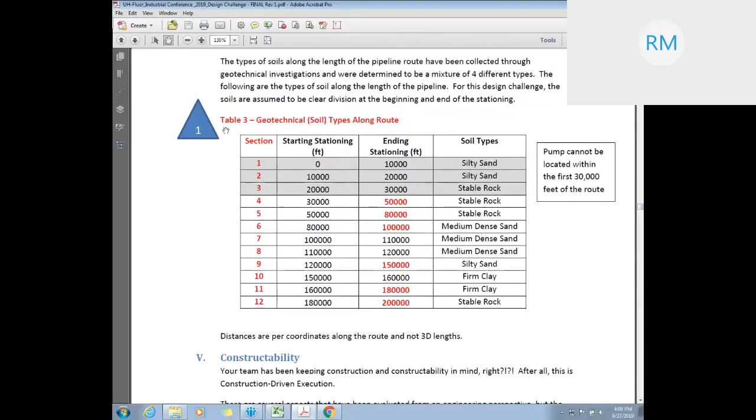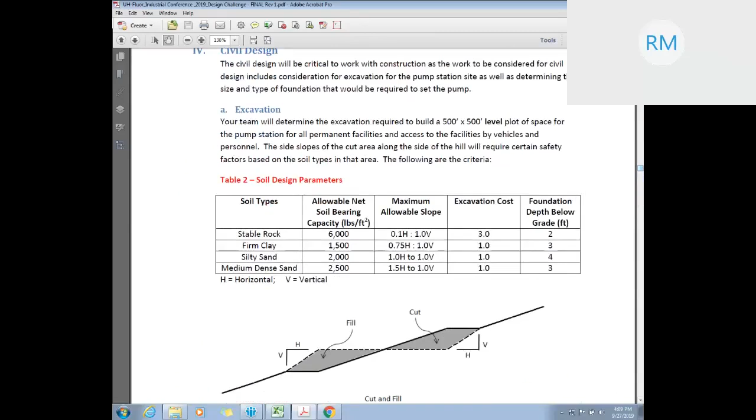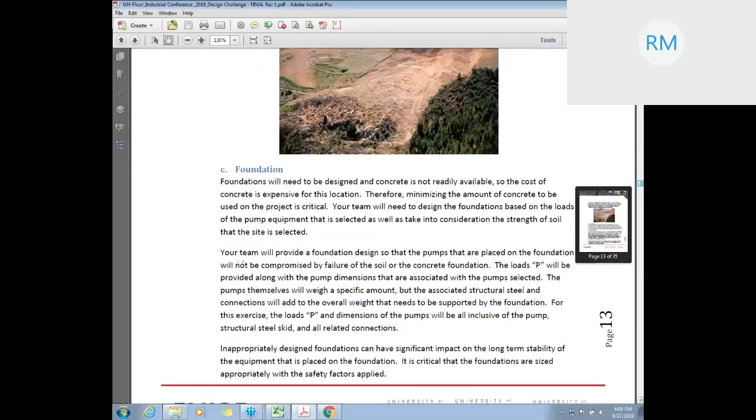So when we're looking at the site, as David had talked about the other day, we're concerned about providing a stable slope. You remember these pictures up here. Where is it, David? Here we go. Okay, so this is an example where they had done some site work, and the slope was too steep, and then they may have had some rain and some other circumstances that created an instability in the soil, and they had a soil failure, and it all collapsed, as you can see here.

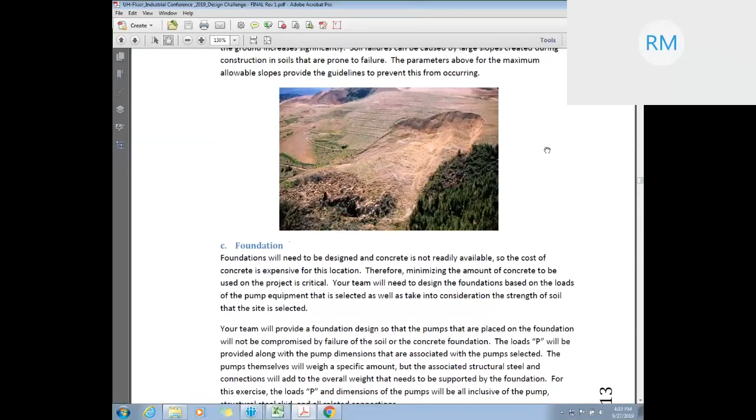And you may have seen this sometimes right close around U of H campus. I know in the bayou they had some slope failures at one time when we had a lot of heavy rains. So it's really important that you understand the type of soils that you're working with and be able to design appropriately to avoid these types of soil failures.

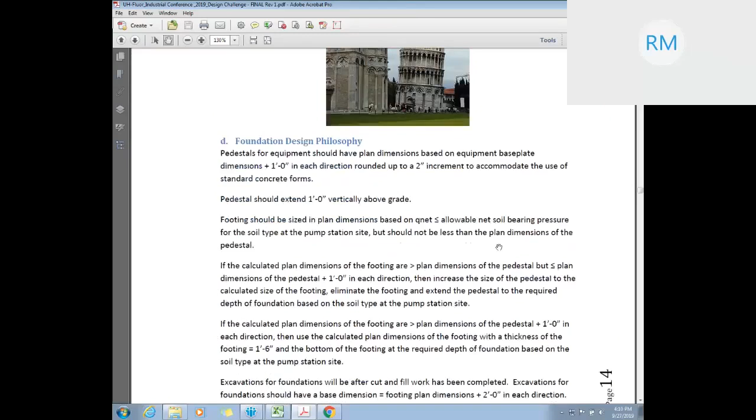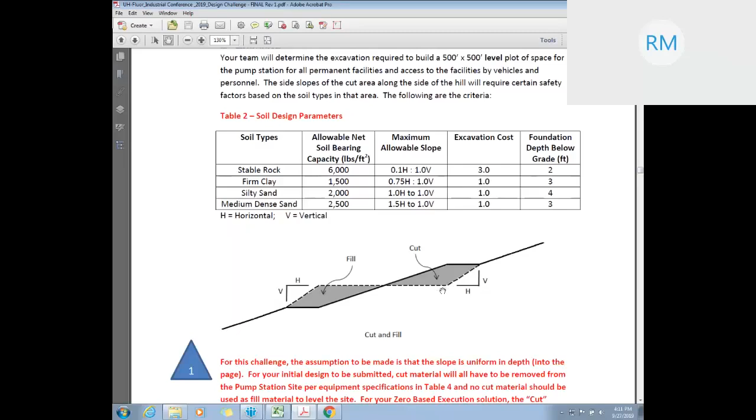Okay, so as you can see here, most of your profile will be something like this, shown in this black line here. So it's different slopes along the profile, and to create a site large enough for this pump station, it may require some area of cut and fill, or a combination of the two, with the idea being that this level portion, let me blow this up a little bit, like in here, would be a 500-foot dimension.

Now, for the first stage of this challenge, we've decided that we want you to look at it only utilizing cut, and that this cut material would have to be disposed of. So what you're going to do is find an area where you can put a 500-foot level area, cut out the existing slope there, and this would go 500 feet into the page, basically uniform depth, and you would calculate that volume. That would be the volume that you would use for pricing out the equipment required for the excavation, and the dump trucks required to dispose of this cut material.

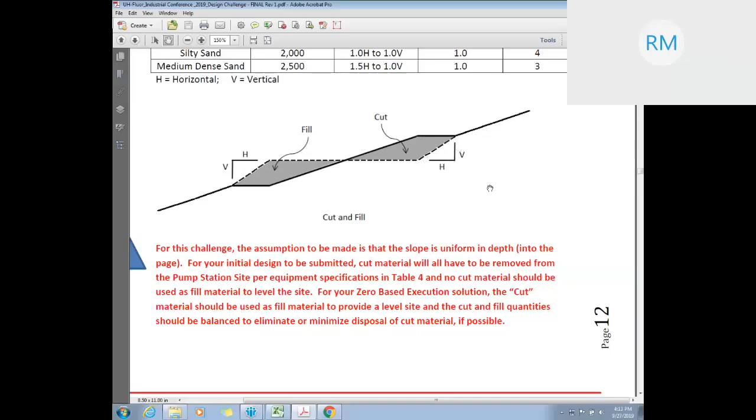You'll also notice that there's a certain slope requirement that we would need to cut this to, to ensure that we have stability on this slope and that we don't get a failure that would put our pump station at risk. So if you go up to Table 2, it will give you, based upon the different soil types, different parameters for the soil, and one of those is the maximum allowable slope, as a ratio of the horizontal to vertical dimensions, and this will help you determine what this volume of cut material will need to be.

Now you also notice that there's a certain excavation cost associated with different types of soil materials. If you're dealing with rock, it's a lot harder to excavate, as you can imagine. In some cases, they even have to blast the rock to break it up and be able to excavate it. We're not going to try to include all of the different equipment that might be required to excavate rock.

What we're simply going to do is put a factor on that, and that would include more cost to account for the fact that it's more difficult to excavate rock. So the basic piece of equipment that we're assuming for the excavation is a track hoe. Now, obviously, there might be other types of equipment that's used, but to make this a more simplified exercise, we're incorporating all of the cost of any equipment and labor associated with that into the cost of a track hoe.

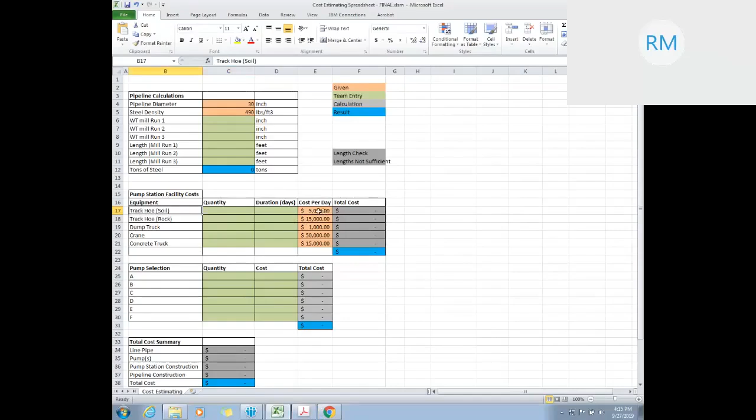And you'll see that the rock has a $15,000 cost per day, and you'll have to determine how many track hoes will I need and for what duration, so we can calculate this cost per day, right? And then the track hoe for soil is just $5,000 per day. So that's where you see on this excavation cost, this rock is at a cost factor of 3, and then the soil, whether that be firm clay sand or this medium dense sand, would have a cost factor of 1.0. Okay, so that's what this is

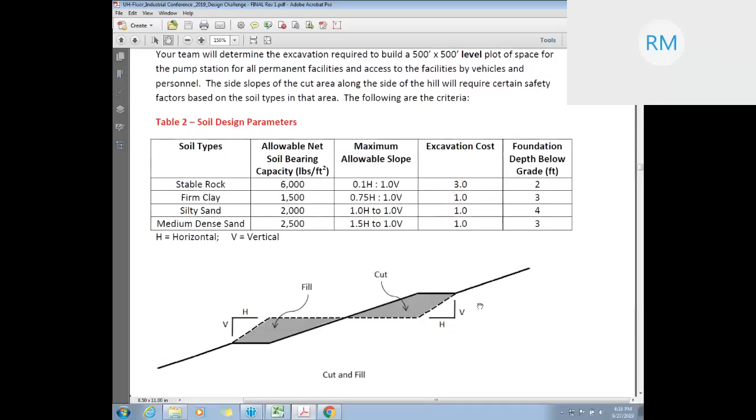relevant for. Okay, so you'll be calculating this cut volume, and then if we go down to the constructability part of this challenge, let me get to it. I passed it up. Hold on, give me a second. Okay, you'll see right here the equipment requirements for excavation, really excavation and the foundation. And so the requirement for a track hoe is that it can handle 10 cubic yards per hour of excavation.

So once you calculate your total excavation quantity, then that will determine how many hours of a track hoe that you'll need. Now, you don't necessarily have to use just one track hoe. You could use multiple track hoes if you want to, but there'll be a cost associated with that. So you just need to decide what is the right selection of equipment based upon the time and the cubic

yards of excavation required. And then, of course, the dump trucks. You can see here, all of the cut material we're going to assume has to be hauled off the site and will not be utilized for the construction of the site. And so each dump truck has a capacity of 12 cubic yards, and it has a 4-hour round trip. So that's how you'll calculate how many dump trucks you'll need and be able to come up with a schedule for doing this work.

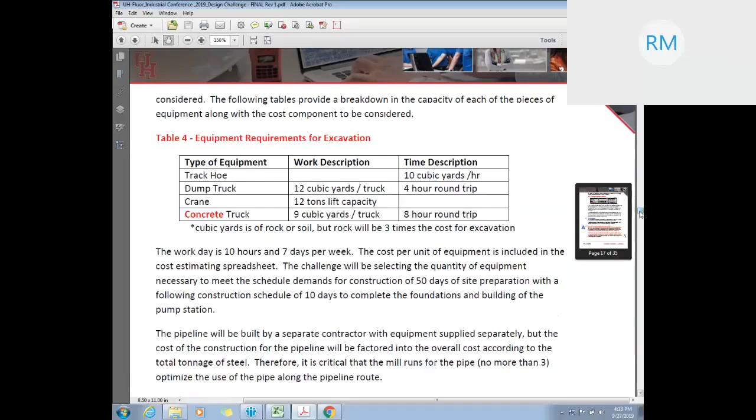You've got to really look at what can I do in one day with the equipment I have. We want to make sure that we're staying productive with our crews and our equipment and utilizing that in the right proportions to be cost effective. Okay, so if we go back to our diagram for cut and fill,

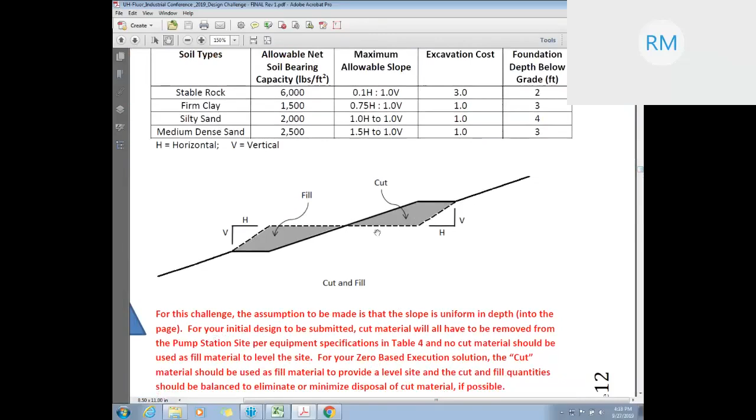like I said, in the initial challenge, we're just going to consider the case for doing cut and creating a 500-foot area here. Now, for the zero-based execution solution, which would be the secondary effort that we do, we're going to allow this to be a cut and fill operation. And the concept for that is that we would use the cut material for fill material down here so that we don't have to haul off any material, and that's called a balanced cut and

fill. And that helps keep your costs down because you're avoiding transportation of materials, and you're balancing out your need for both cut and fill. So in that case, you've got to figure out how do I best locate my site to be able to balance my cut quantity with my fill quantity, so hopefully I won't have to dispose of any excess material. And so that's the idea behind the cut and fill.

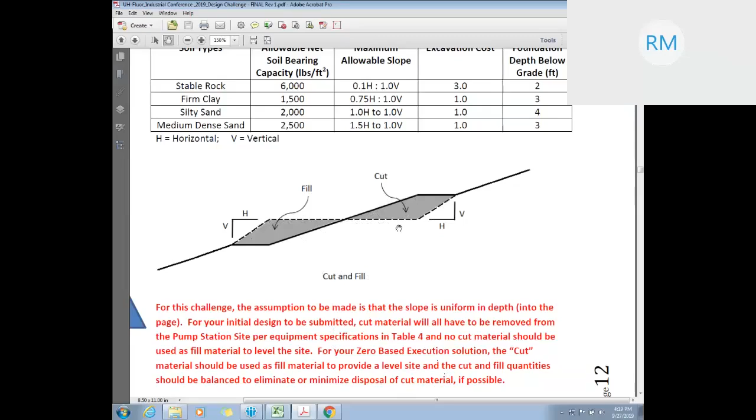Now, what I would say is in calculating your cost of equipment, you'll base it upon the cubic yards of cut. Where you have cut and fill, then you'll have to also include the track hoe for the cubic yards of fill. Okay, so it's two separate operations. Even though we're using the same material, you're handling it twice, once for the cut and once to place it and compact it for the fill.

So you will have to balance that cut and fill, but for calculating the track hoe and the amount of time that you need the track hoe, or how many track hoes you need, you'll have to look at that for the quantities of cut and then the quantities of fill also. All right, so that's the basic concept around calculating excavation for cut and the whole cut and fill operation, and how you would determine the equipment requirements.

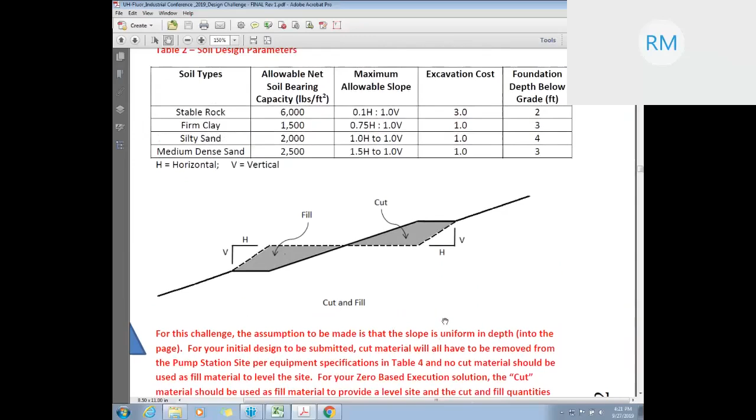I want to move on now and talk about the foundation design. For the foundation, this is a remote site, and so getting concrete can be very difficult because of the location of the site away from a concrete supplier. And so not just from a time factor of transportation, but just the cost of transporting that, it may require certain measures be taken in the concrete mix to slow down the setting of that concrete.

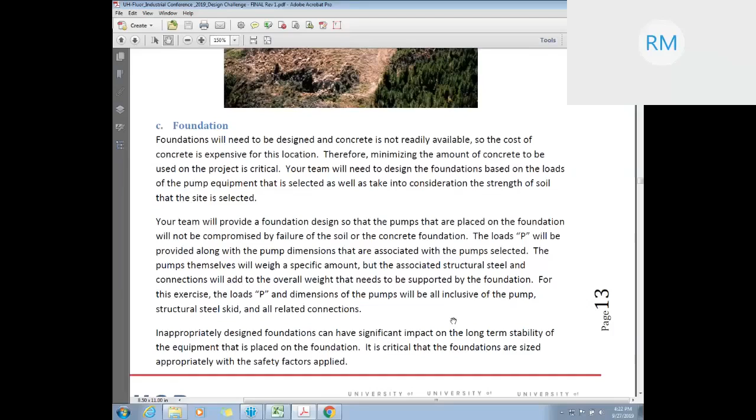So they might add some special concrete admixtures to the concrete to delay the set of the concrete, and that makes the concrete more expensive, because this has a long distance they have to travel, and they don't want this setting up too soon. So we've included that cost through our equipment costs. If we go back down to our equipment again here, you'll see a concrete truck which has a capacity of 9 cubic yards per truck, but it has an 8-hour round trip. So it's going to take all day for one truck to make a round trip.

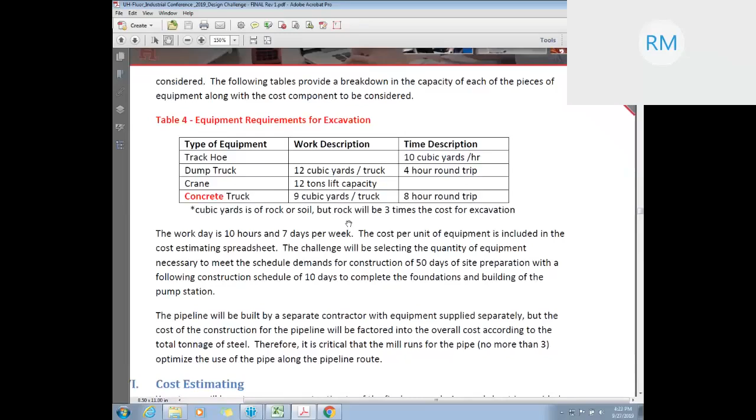And so you'll have to figure out how many cubic yards of concrete you're going to need for this foundation, because that will determine how many trucks you will need. And we want to place this concrete all at one time. We don't want to pour part of the foundation one day and then wait another day and pour. We like to do it all at one time so that it's one monolithic pour of concrete. So that means that you're going to need multiple trucks more than likely.

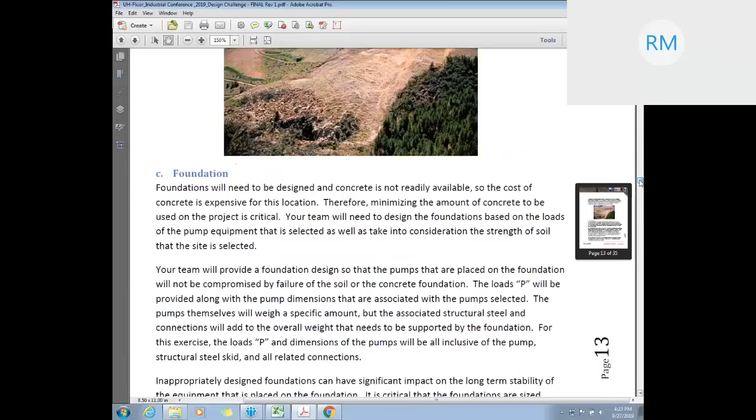So how do we go about designing the foundation? Okay. Well, we want to make sure, first of all, that we're minimizing the amount of concrete that we need to use. And you'll notice, if you go back up to the soil chart here, that based upon the type of soil you have, the foundation depth may be different. If you're on stable rock, then you don't need to go as deep into the stable rock to get a firm soil for your foundation. But if you're using other types of soils like clay or sands, then there can be other factors that would require you to put your foundation deeper. And of course, the deeper your foundation, the more concrete that is required. So this is a variable based upon the soil type that you'll have to take into consideration.

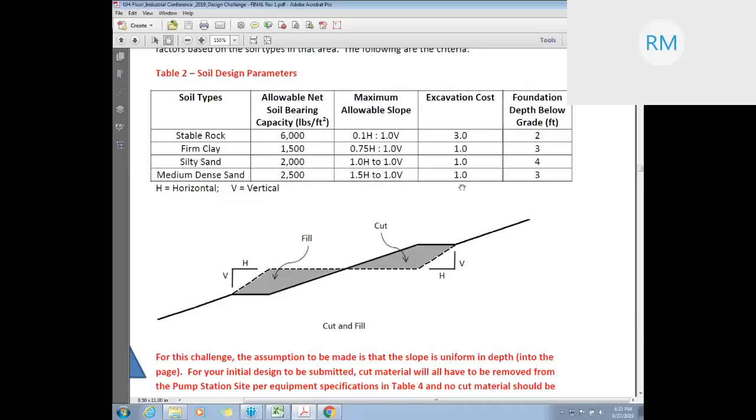Now, while we're here, let me also point out that different soil types have different allowable soil-bearing capacity. So some are stronger than others. Some of them may be more susceptible to settlement due to the type of soil it is, and therefore the soil bearing is limited so you don't have excessive settlement. So you can see that stable rock, as you would imagine, can support a significantly higher load than other types of soil materials like clay and sand. And so this can have a factor in sizing your foundation as well. So how do we go about sizing the foundation? So let's go on down to that section again.

And you'll see that we want to make sure that the pumps are placed on the foundation such that it will not be compromised by failure of the soil or the concrete. Okay, so the loads are designated as P. That's the weight of the pump and the structural steel skid and all of the related connections. So it's what the foundation is supporting. It's a weight that the foundation has to support.

And of course, if you don't have a properly designed foundation, that can have a significant impact on the long-term stability of the equipment. You know, a pump is a rotating piece of equipment, and it creates dynamic loading, rotational loads on our foundation, and that creates vibration. And the more vibration that you have, the more your bearings and other components can wear out. And so we have to size the foundation that's going to provide enough mass to dampen that vibration and also be able to support the weight on the type of soil conditions that we have.

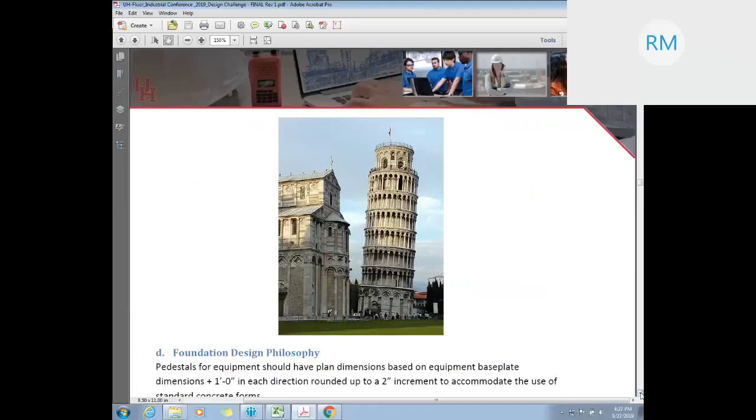And so that's how we go about deciding how big a foundation we need. Obviously, it needs to be big enough to provide full support of the entire skid. So part of that is based upon the size of your pump. And as you remember yesterday when we were talking about pump selection, these pumps are all different sizes in terms of their skid dimensions. And so the larger your pump, obviously the larger your foundation is going to be, and that's going to add to your cost because of the cost of the concrete.

So obviously the smaller we can make the foundation, the more cost effective it's going to be. But the trade-off there may be your pump capacity. So you've got to look at all of these trade-offs and decide what is going to be my best cost-effective solution, considering the size of the pump and the cost of the concrete, and all that comes into play.

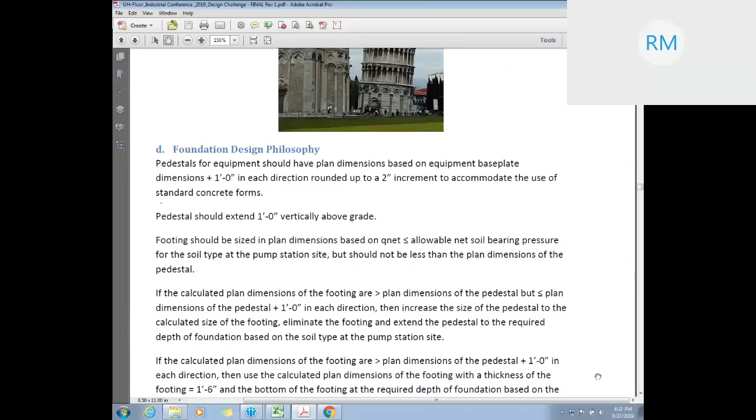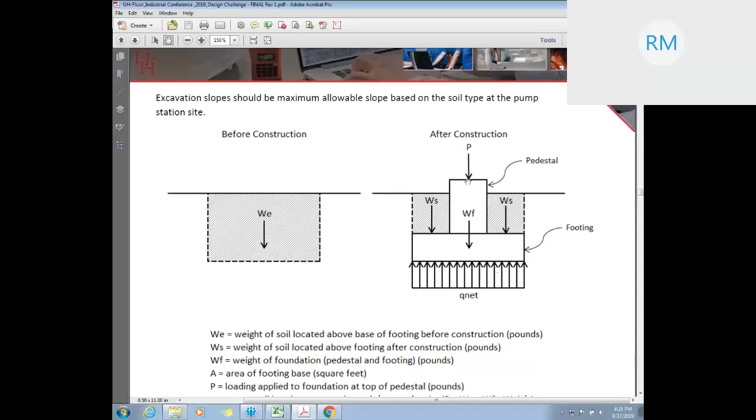So for sizing the pedestal, it should have a plan dimension based upon the equipment base plate dimension, or the skid dimensions, plus 1 foot in each direction, rounded up to a 2-inch increment to accommodate the use of standard concrete forms. Okay, so those plan dimensions of your pump base are provided in the table for the pumps, and then you'll need to add 1 foot in both directions in a 2-inch increment, rounded up, and that would be how you size the pedestal.

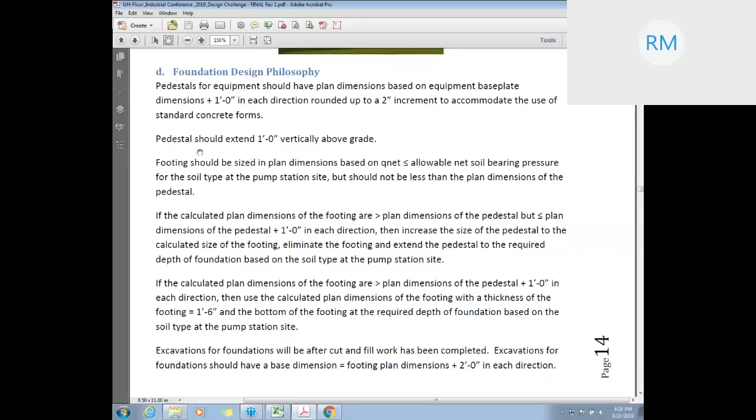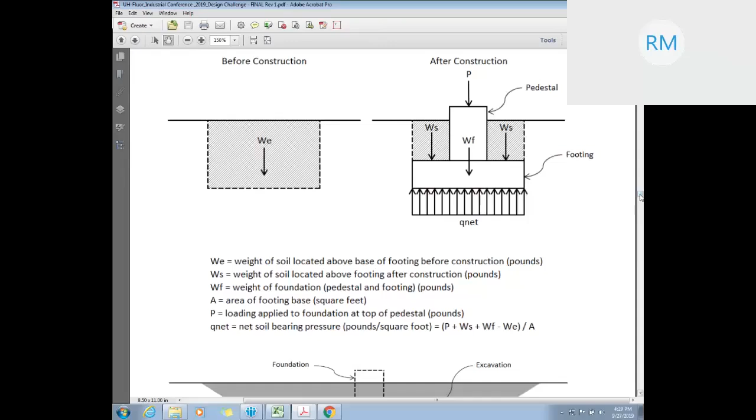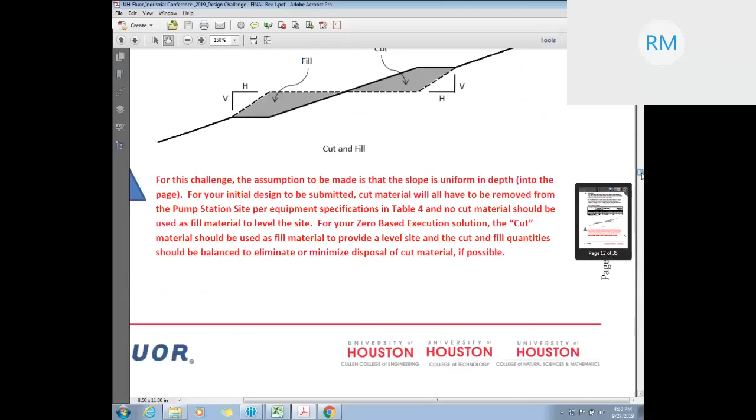The pedestal should extend 1 foot vertically above grade. So your pump is going to be supported 1 foot above grade, right here. If this area flooded out here, we don't want the pump to be submerged. So we like to have it elevated so that it won't get affected by water that might collect on the site during a rain event. Okay, so then below grade, as we saw, you need to extend the foundation 2, 3, or 4 feet depending upon the type of soil that you have, okay? So that's how you size the pedestal.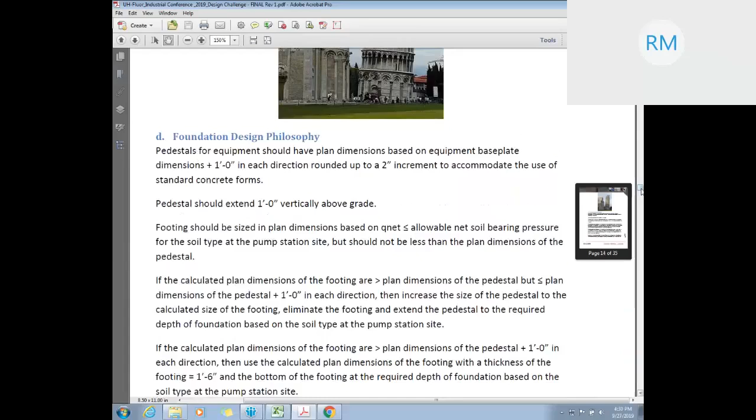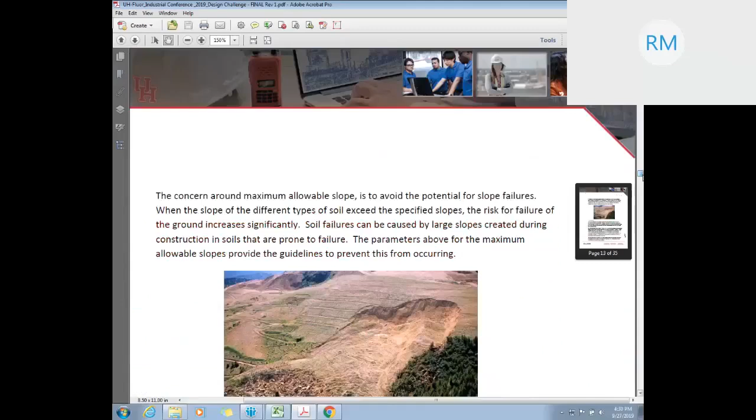Now, the footing should be sized in plan dimension based upon the allowable soil bearing pressure, which was in the table up here. So this is the maximum allowable net soil bearing that each of these soils can provide. And then we calculate what we call Q net, which is our net soil bearing, with this formula that's provided right here. This defines all of the different components of that. So you're taking the weight of the pump, the weight of the concrete, which is the pedestal and the footing, and also the weight of the soil that's on top of the footing. So all of this weight is combined and divided by the area of the footing base. And that's how we determine what our Q net is.

Now you'll notice that we have to subtract out here the weight of the soil located above the base of this footing before construction. And the reason for that is the net soil bearing is the additional weight beyond what that soil is already experiencing, right? And so right now, if we look at this elevation of the soil right here, all of this existing soil is sitting on top of it, so it's already bearing the weight of that. So the net soil bearing is the weight that we're adding in addition to that.

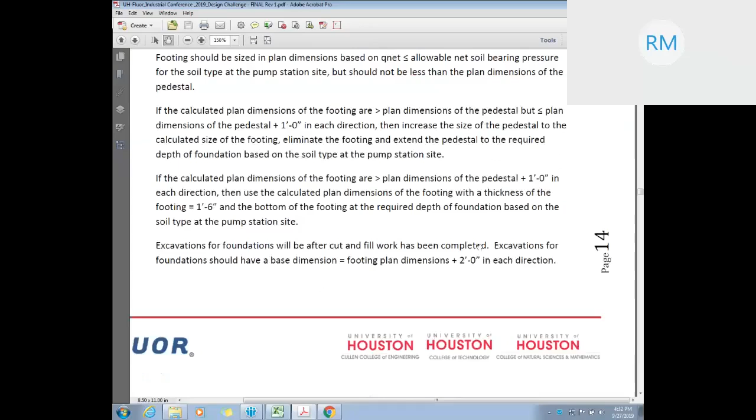Now, once you've determined that, you may realize that, hey, the footing size I required is actually smaller than the pedestal size. So do I make a footing that's smaller than the pedestal? And I would say, well, no, you don't want to have a footing that's smaller than the pedestal. So in the event that you find that the footing size comes out less than the plan dimension of the pedestals, then you would just extend the pedestal all the way down to the bottom of the foundation, and you would not require a footing in that case.

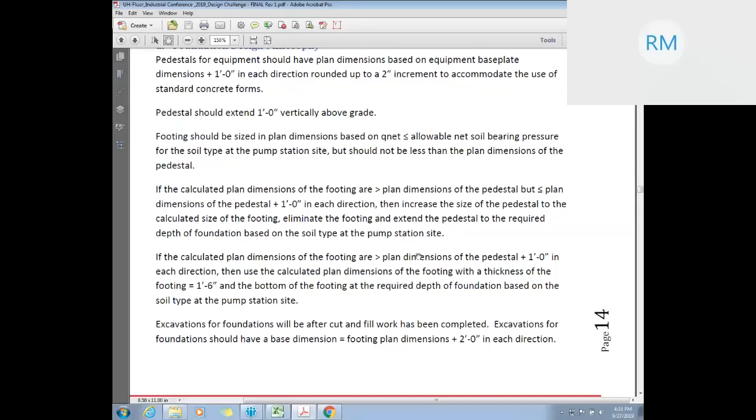Okay, so that's what it's saying here. You don't want to make the footing less than the pedestal size, but it doesn't have to be more than the pedestal size if you meet the requirements for the allowable soil bearing pressure, okay? And that often is the case with pumps because their plan dimensions are fairly large compared to their weight, so you might find in a lot of cases that you won't even need a footing. You just extend the pedestal down and that will be enough area to support that.

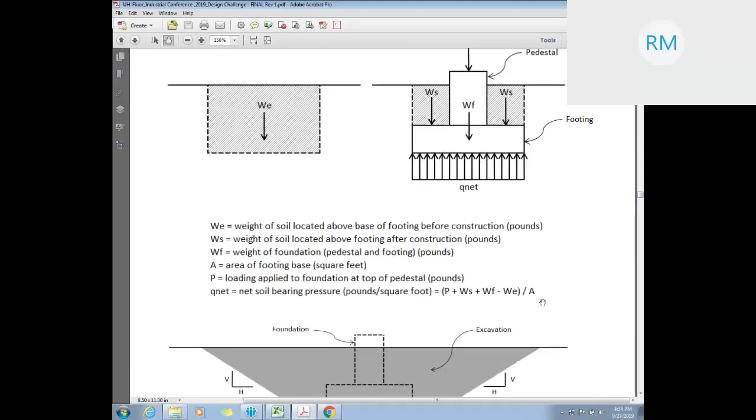Now, if you don't have a footing, then you're not going to have any of this soil above the footing, and then this equation would just be the pump weight plus the foundation weight, and then you'd subtract out this weight of soil and divide it by the area of the footing. Okay? So all that's spelled out for you there.

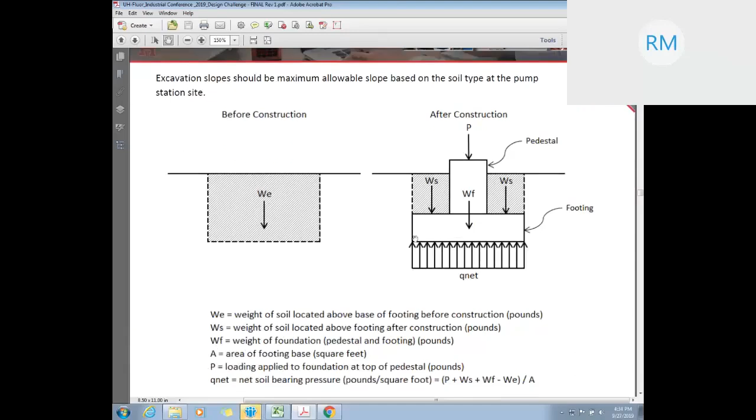Now you may say, okay, what is the thickness of the footing? How thick should I make this footing if I need a footing? And so we give some guidance on that here also. It says use a thickness of 1'6". We also say that if your plan dimensions of the footing are greater than plan dimensions of the pedestal, but they're less than 1 foot larger than the pedestal, then it doesn't make sense to make a footing. You know, it's more economical just to make a larger pedestal, and that's what this paragraph is saying.

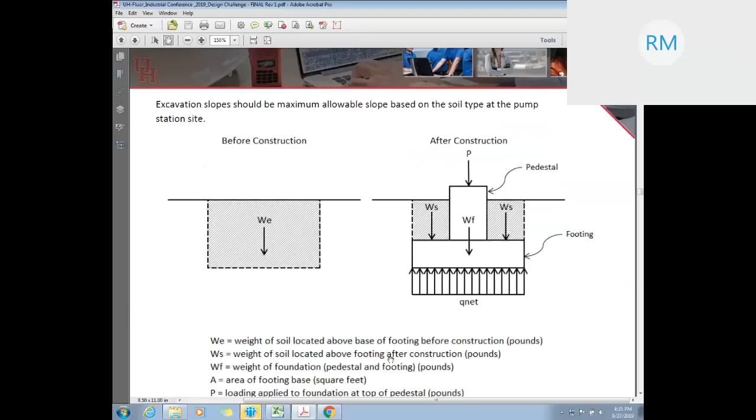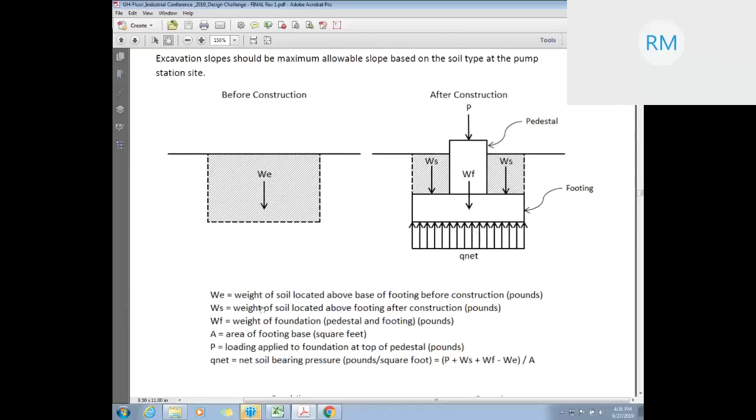Okay, but let's say that you have a footing that is greater in size than 1 foot larger than the pedestal. In that case, then you would extend that for the required dimension based upon the allowable soil bearing and make it 1'6" thick. Okay, so the thickness would be 1'6", and the plan dimension would be based upon what's required to meet the allowable soil bearing. Okay? So that's basically how you size the concrete. I think if you kind of read this some more and work out the calculation, you'll see how it's actually pretty simple.

Okay, so that leads us now to the fact that we've got to construct this foundation now that we've decided what size of foundation. And so we have to provide an excavation of the soil to be able to construct the foundation. And similar to the excavation we're doing for the cut to establish a level site, we have to provide an excavation with side slopes that will maintain stability while we're constructing the foundation. Because what you don't want to have happen is people working down this hole and then have the hole collapse and people get trapped and get injured or get killed.

And this actually happens quite frequently with people working in excavations that don't have safe side slopes on them. Sometimes they'll just do a vertical cut and put somebody down in a hole, and the side slopes aren't stable and it'll collapse and they'll suffocate. And so that's a really big problem, and so that's why it's important that you provide a safe excavation for them to work in and build this foundation.

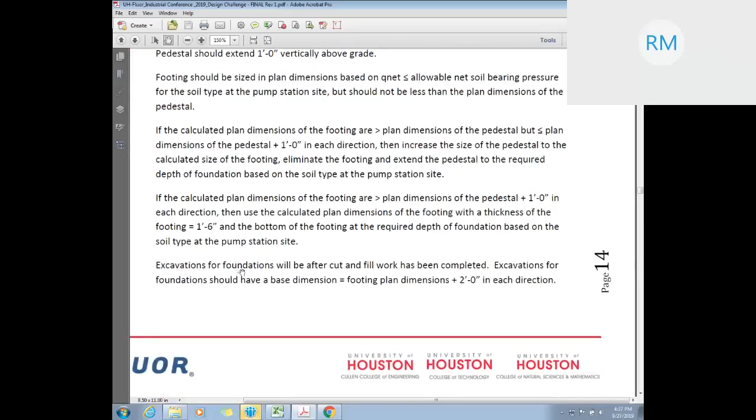And so the idea then is that after you've got this level site, we're going to come back in and do some excavation for the foundation. And this will be after all our cut and fill work is completed on the site to create the level site. And so we got to create an excavation that is going to allow enough room to construct this foundation. So they're going to have to put some forms up here. They got men working down here.

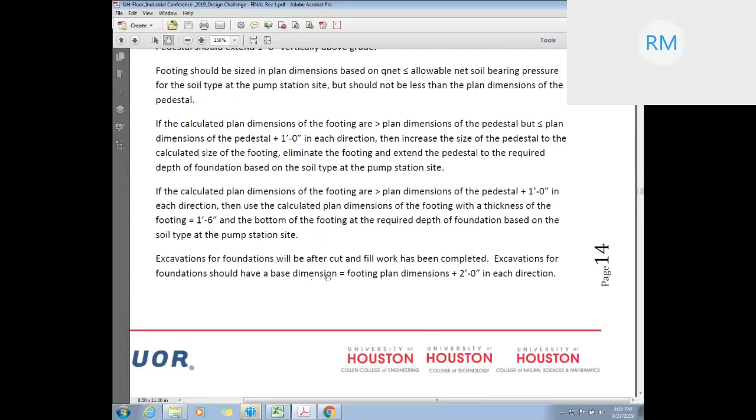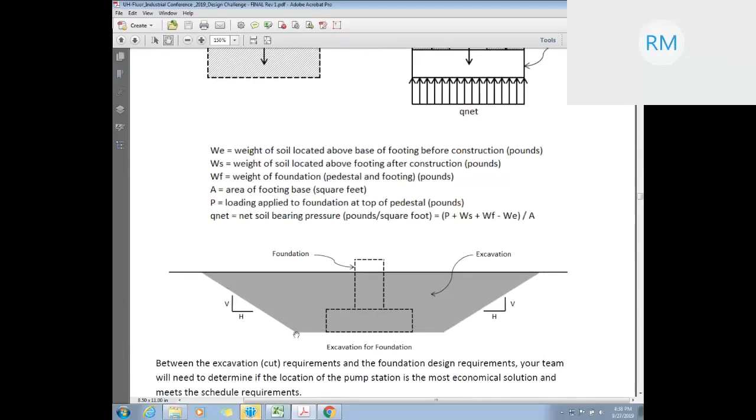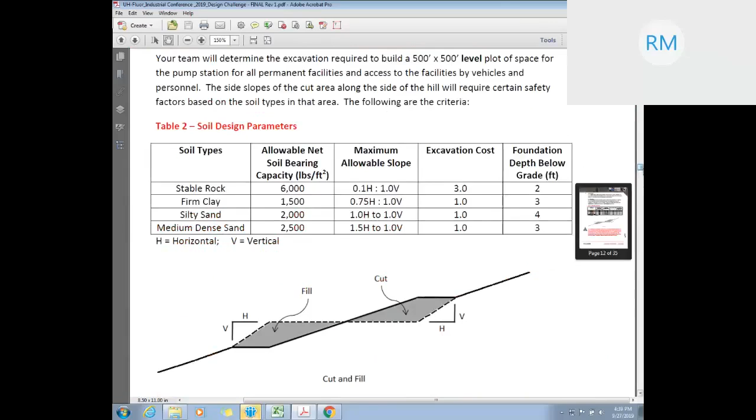And so they need at least an excavation that's 2 foot larger in each direction than the base of the foundation. So that's why we say here the excavation for foundation shall have a base dimension equal to the footing plan dimensions plus 2 foot in each direction. And then from that point, that establishes this base dimension of the excavation, and then your side slope would be determined by your soil type. That was up here in our table for the soil types. The same information we used before for this cut and fill operation.

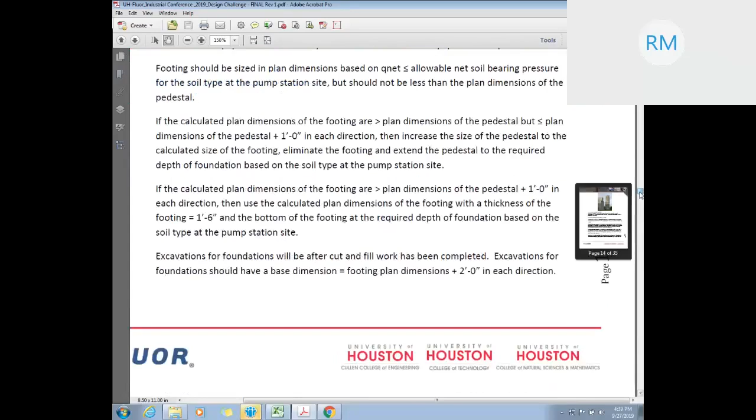All right. Now, in pricing out the equipment and the cost of this concrete and this excavation for the foundation, you're going to calculate a total cubic yards of concrete for this foundation, and that will determine how many concrete trucks you need, right? And then for the excavation and backfill, you're going to require a track hoe for that, and you'll calculate the cubic yards of excavation

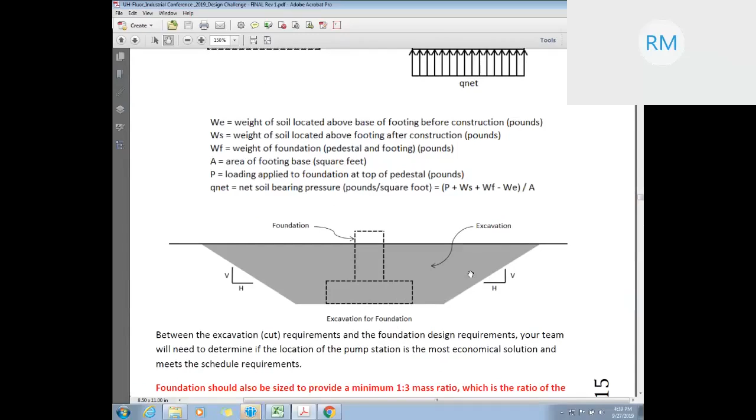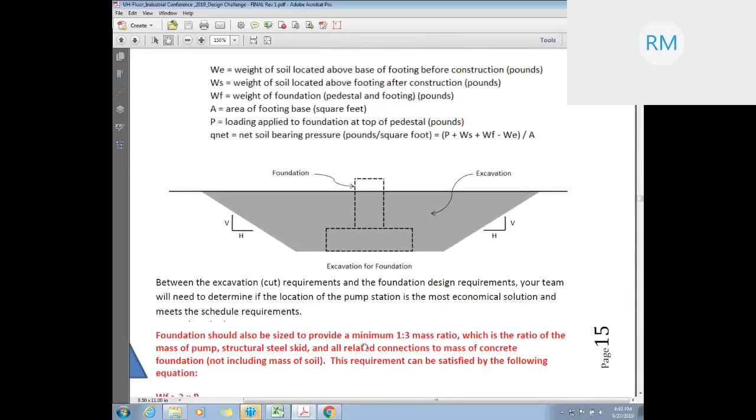and then again apply that same cubic yards to backfilling this material once you have constructed the foundation, because we want to put the soil back in place around the foundation once the concrete foundation has been completed. So that's two operations, one for excavation, one for backfill, and both of those will use a track hoe, and the quantity will be based upon the excavation quantity.

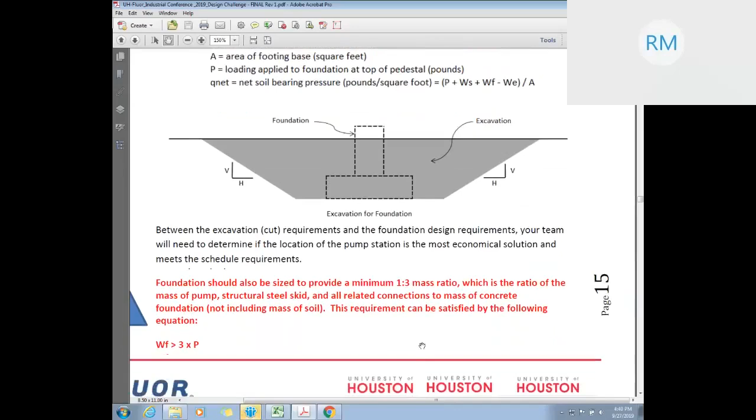Now there is one more requirement that needs to be met in addition to the requirements that I already stated above in terms of sizing your foundation. And that is that the foundation should also be sized to provide a minimum 1:3 mass ratio. And this ensures that you have enough mass to help dampen the vibrations that may occur in that pump during operation. And so once you have sized a foundation based upon the parameters we've provided up here, then you'll need to check the mass ratio.

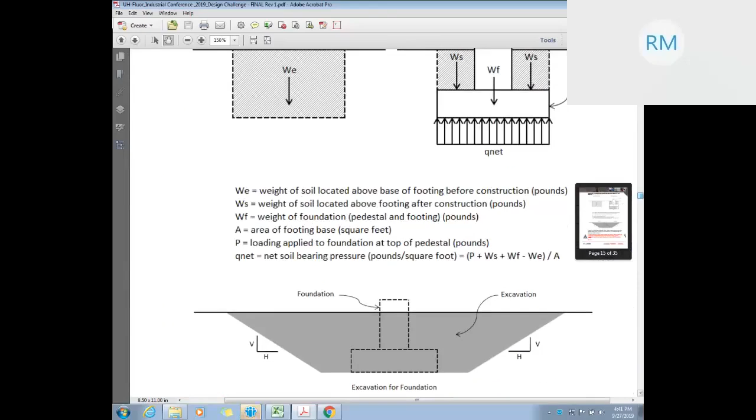If you find out that you don't have enough mass of concrete to meet this ratio, then you're going to have to oversize your foundation to accommodate the mass ratio, even if it's not required for the soil bearing or for the minimum size pedestal required to support the pump. So here again, there's another criteria of consideration that may actually control the size of your foundation that you'll have to satisfy.

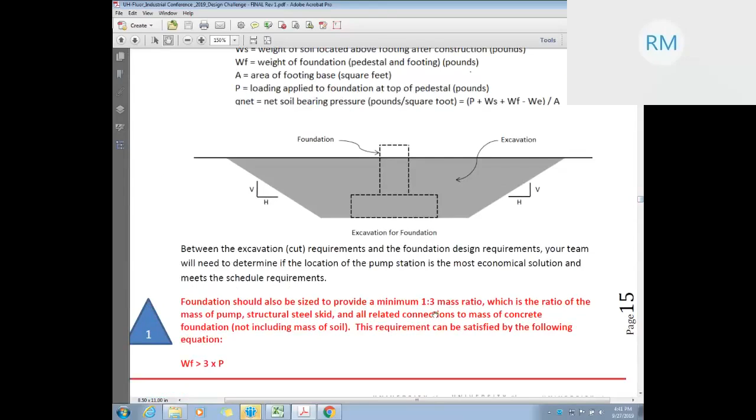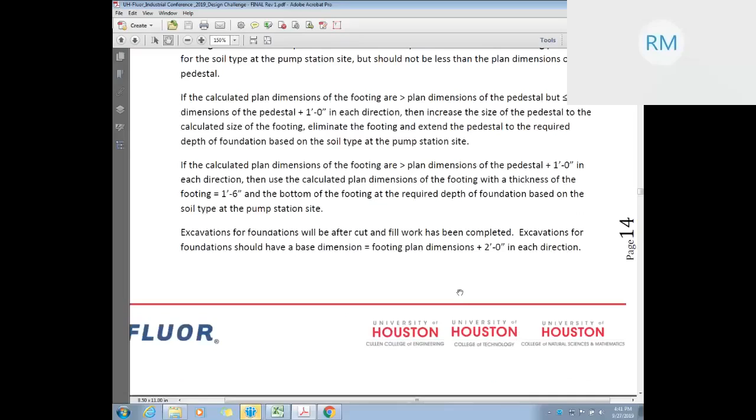Okay, so all of these calculations that you'll be doing for cut and fill and your excavation, for your foundation, for sizing your concrete foundation, and determining how many track hoes and concrete trucks and all that's required, you need to provide all the backup calculations for that, and they need to be shown and submitted with the native Excel file, MathCAD, or handwritten calculations that you perform for this.

Now, of course, you're going to also use the estimating spreadsheet that was provided to capture the cost, the materials, equipment, and labor, but in terms of determining the quantities for excavation and backfill and concrete, you need to provide those calculations separately, and you need to show all of your work so we can see that you properly designed it and it makes sense, and that you followed all of the parameters provided in the design challenge to come up with those quantities.

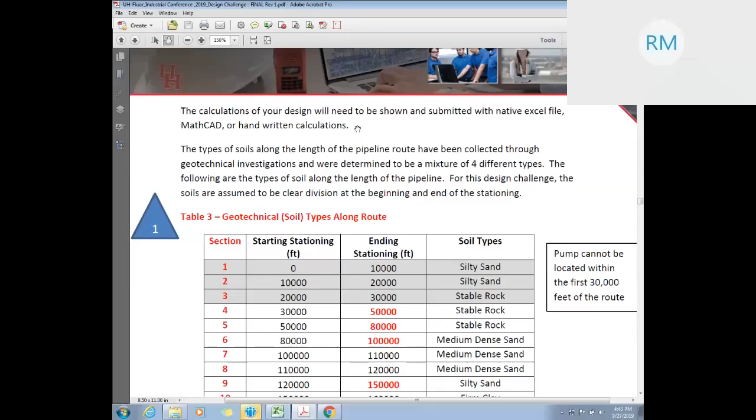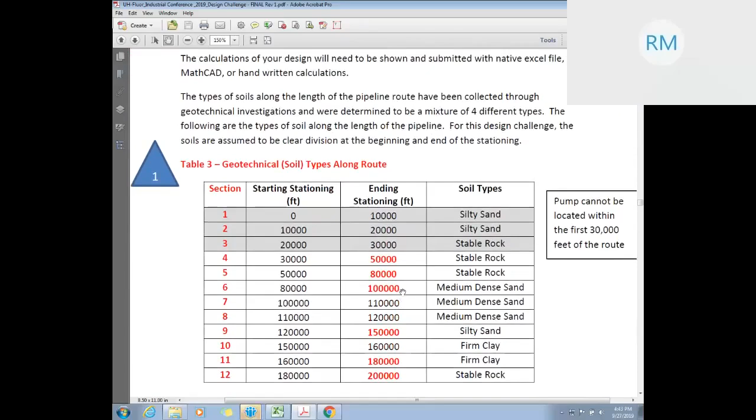Okay, so that gets us through this section of how to do the excavation, the cut and fill operation, the foundation design, and how we price out the equipment. And at this point, I want to see if there might be any questions, or if David, if you want to add any additional information about this aspect of the design challenge, I think we could talk about that now.

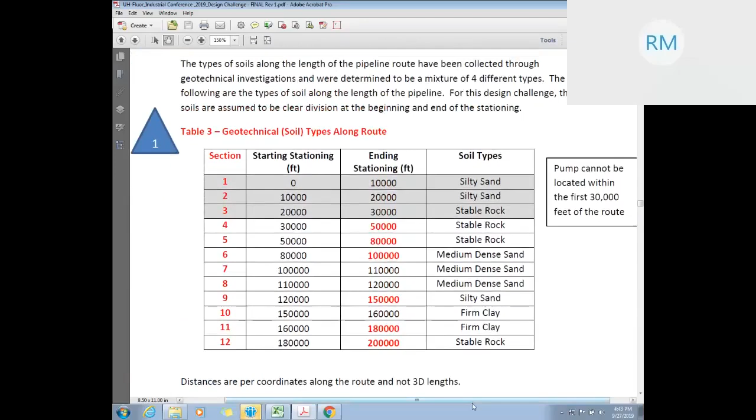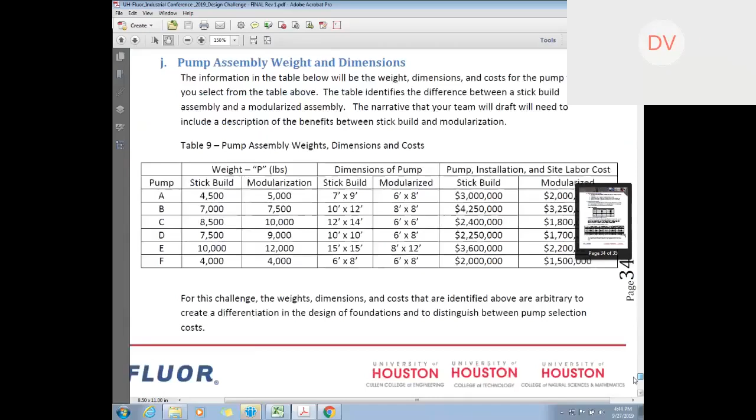Yeah, one quick note is for your loads P, as well as the dimensions for the pump station assembly, you'll have to go to, I believe it's maybe table 7 towards the end... no, not quite. Further up in the document, there will be a list. Oh, yep, right there, table 9, and it's the different pumps that have the weights identified as well as the dimensions. So that will be your input for the sizing of the foundations and the design of them. Yeah. So see right here, it has your P. That's the same P that we showed on that foundation diagram,

and remember now, we're going to have the stick build portion of this challenge that will utilize different weights and different dimensions of the pump. And so when you do your modularized version of this, then you'll have to go back and recalculate your foundation size based upon the modular size and weight for the pump. So don't forget to do that. Also, remember that with the zero-based execution, you can consider multiple pump stations. Isn't that right, David?

Yeah, that's correct. And so in that case, now you're going to have to look at cut and fill and foundations and excavation and backfill for the foundation for multiple sites perhaps, and considering different sizes of pumps and dimensions and weights and all of that.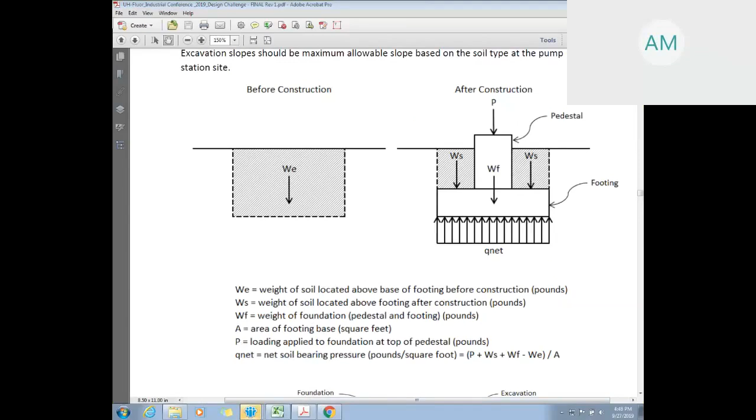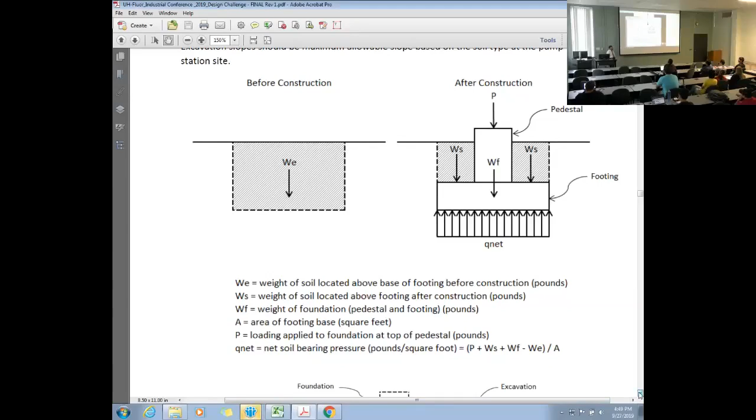Have you gone over the methods of selecting the pump? I'm sorry, I couldn't hear you. Would you be able to repeat the question for me, Professor Siddharthi? He's asking about the method of selecting the pumps. Pump size, and what are the requirements? Okay, so I think that was talked about yesterday. Is that right, David? In session 2?

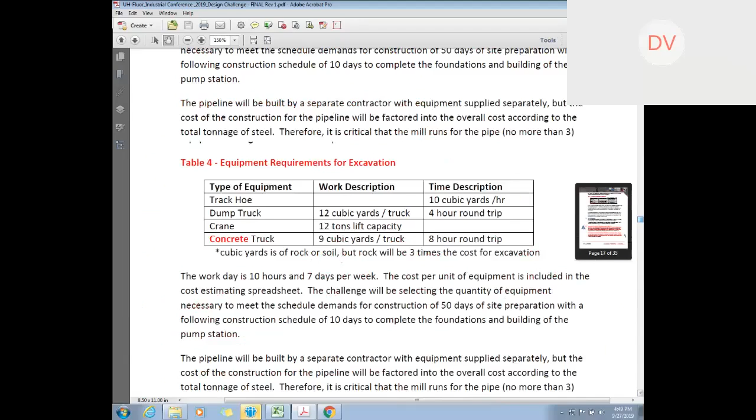Yeah, the info session 2 covered the hydraulics, and you'll have to go through the selection of the pump section, which I believe is 17 of the design challenge, or 16, and generally what you'll have to do is run a hydraulic analysis, determine the horsepower requirements and the net positive suction head available to locate where that pump needs to be along the pipeline route. You'll have the capability of placing it at multiple locations, but your team will have to decide on the most cost-effective location. It's the two primary criteria, horsepower and NPSHA, that you'll select that pump by.

So, David, one thing I would say about that is you may find that there's an optimal solution for the pump based upon hydraulics. That may not result in the best location from a standpoint of excavation or concrete. So that's why you got to look at both sides of this, and decide what's going to be your overall best cost-effective solution.

So you may have a preliminary pump size and location that you've determined initially, and then when you start looking at the foundation, you might come up with a solution, but you might want to then try some other cases to see, hey, can I spend a little bit more on a pump and reduce my costs by having a better location for my pump? So there's trade-offs, and you're going to have to consider various options. Don't just go with the first size of pump that seems to work best. There may be other factors that really control the cost of the project. And that's what makes it a challenge.

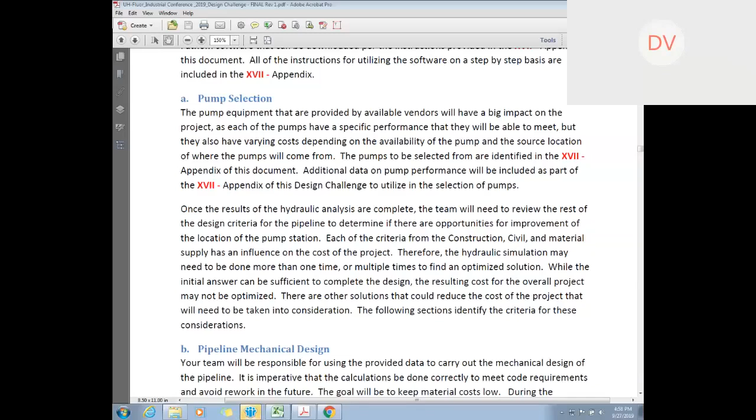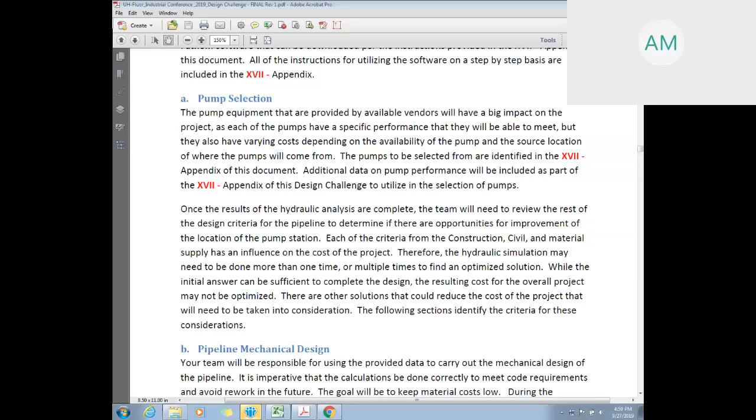Okay, so Aish, we don't have anybody, no more questions. Okay, Professor Sinucci, I think there are 11 students right now. If perhaps after this session you're able to facilitate them forming teams, and if you're able to provide me with those who are not able to form teams, because we had a couple of students write us an email about finding a teammate, perhaps we could help out offline with the team formation. So if you can spend some time after the session so that they can form the team and register in order to be able to access the narrative.

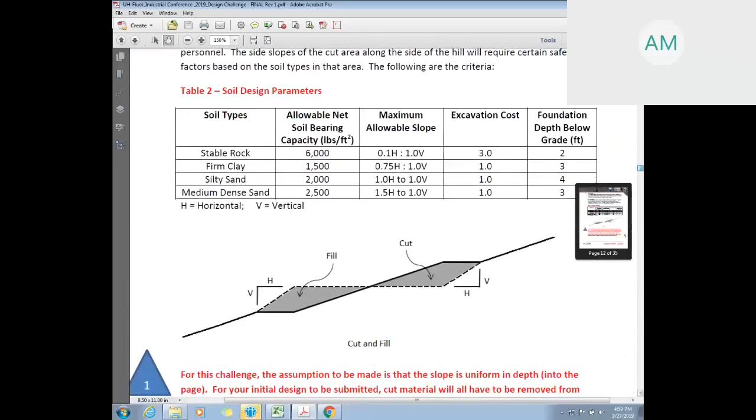So that is one issue that I see that was brought up. Any other issues that you have with respect to understanding what's going on, with respect to installing AFT software on your laptop? Were you at least able to do that? Can you please answer her question? How many people were able to run the software? Okay. All right. So we just have about 4 to 5 weeks left. So we are talking about 5 teams, 6 teams, yes. So I think it's time that the teams are formed and people are able to start working on the challenge itself.

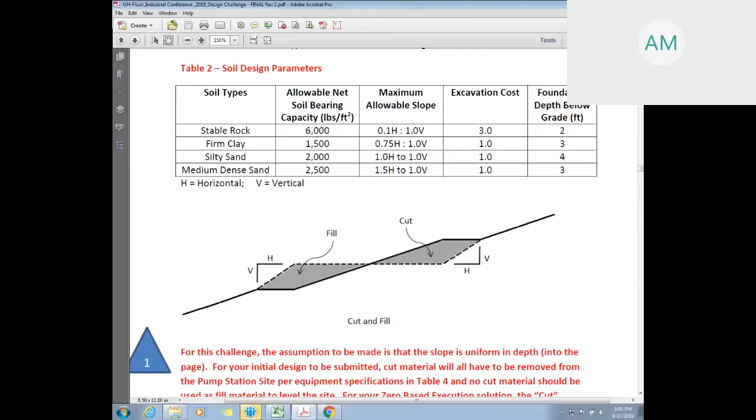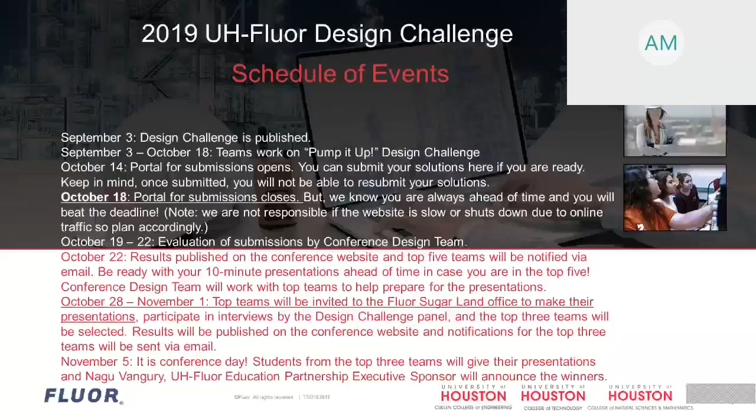The other question that I had was, have the WebEx sessions been informative? In addition to WebEx, would you like us to be there in person to have these sessions, or do you think WebEx is sufficient? Any feedback on that? Perhaps you can send us an email, or Professor Sanucci, if you can give us feedback later on after you talk to the students, that would be helpful too. Because we just have a couple more sessions left, and we want to make sure that the students are comfortable with this challenge and are able to start work on that.

So with that, any last comments, Ron, David? I just pulled up the schedule of events just to make sure everything was clear. The due date for your proposal will be October 18th. So this portal will open on the 14th, but everything will be closed out on the 18th. So be sure to get your proposal in by then. Ron?

I just wanted to encourage anybody. I know that a lot of you haven't really gotten into this yet, and so you may not even have generated any questions, but I'm sure as you get into it, you'll have more questions, and I want to encourage you to ask questions and don't make assumptions, because if you make an assumption about something that's not correct, that will work against you when we evaluate your solution. So it's always best to ask questions, clarify your interpretation of the requirements.